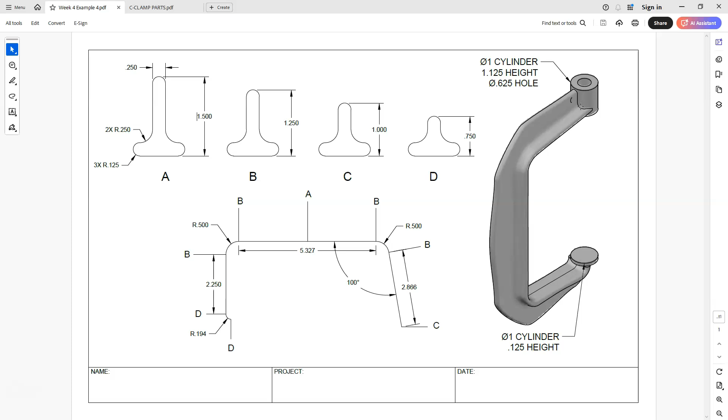So in this video, we're going to be creating these two parts, and we're going to save them. Remember, that's one of the key elements we have to do in order to make an assembly - each one of these files has to be its own separate file. Okay, let's go ahead and jump over to Inventor and get started.

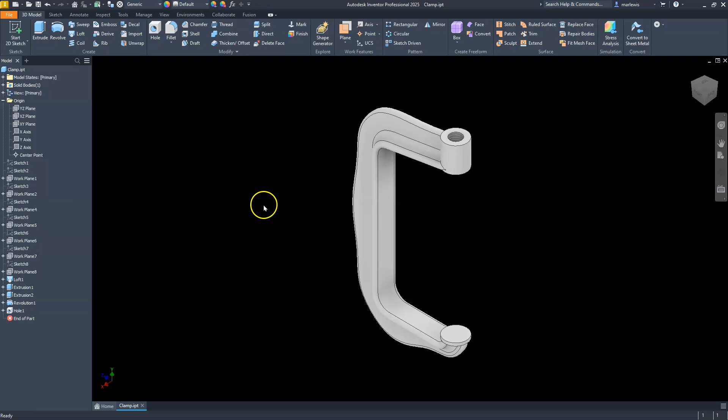Alright, continuing from our clamp here, we're just going to go ahead and start a new part. Remember, this is going to be in inches. Let's go ahead and hit the create button. Then I'll go ahead and start my sketch on the XY plane.

Then I'll create a line that goes straight across. We want to place the midpoint, so I'll use this coincident constraint, find the midpoint here, and place it right on my origin. Let's go ahead and put a dimension on this line, and this is going to be our overall dimension, which is 8.875. I'll come back and change that line to a center line in a second.

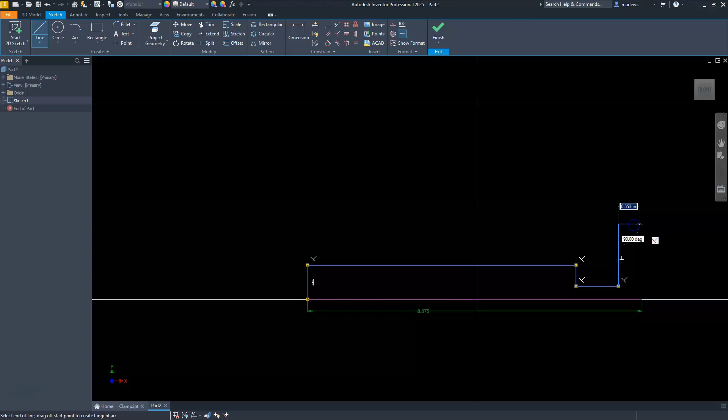Now I'm just going to freehand sketch the rest of this stuff out, over exaggerating these lines. We know that we have a line that goes something like this - it goes across, back up here, across here, and then ends here.

Okay, let's go ahead and select that line, make it a center line. Now we can go ahead and put some of these other dimensions on. So let's do a dimension from here to here. This has a diameter dimension, and it is set to 5/8. Go ahead and hit escape and move this up a little bit.

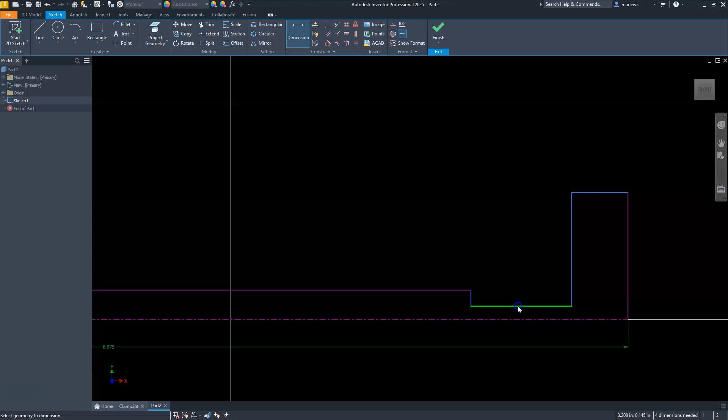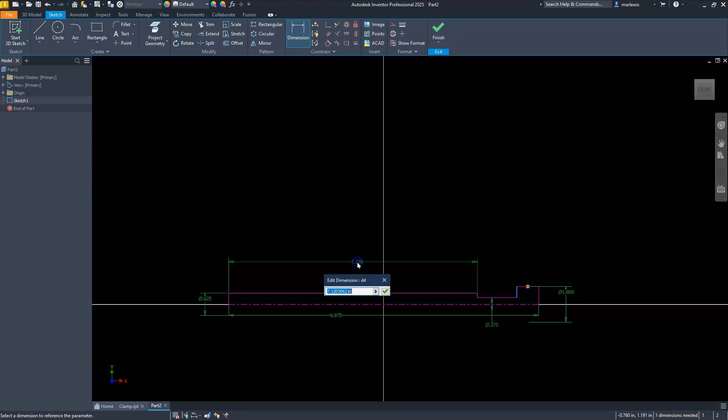Let's go ahead and put another dimension from here to here, 0.375. Dimension from here to here, and that is a dimension of 1 if I'm not mistaken. Let's go ahead and add a dimension going from here - this should be 8.5.

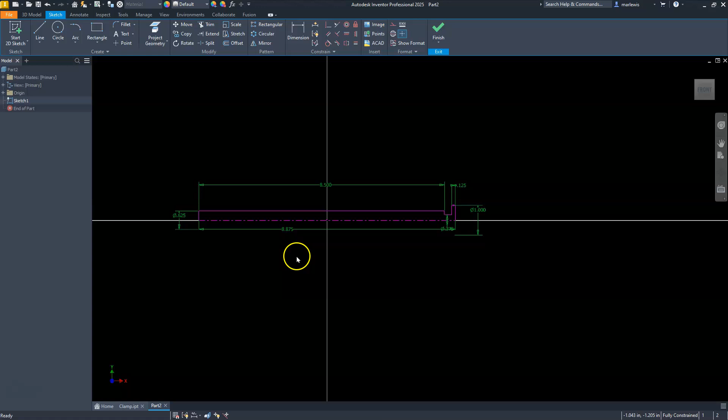Let's escape out of here and look into this corner here. Then we'll add a dimension on this part here, and it is 0.125. Okay, so we've got everything fully constrained. Let's go ahead and finish this sketch.

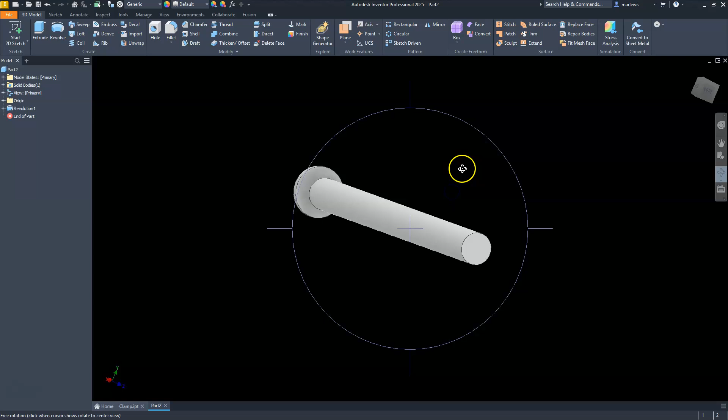Take a look at the Revolve command, and everything should automatically be satisfied here. We'll go ahead and hit the OK button. Let's rotate this around and look at the front view. I'll select the front view here and then create a sketch on it.

Alright, what I'll do next is go ahead and create a couple of rectangles, doing it on both sides. I'll use the collinear constraint, setting these two collinear to each other - these two here at the bottom. Then I'll go to the equal constraint and set these equal to each other.

Let's do some dimensions. From here to here, let's make it 0.5. From here to that point, let's make it half of this 0.5, so I'll select that 0.5 there and divide that number by 2. Let's see what else we can do here.

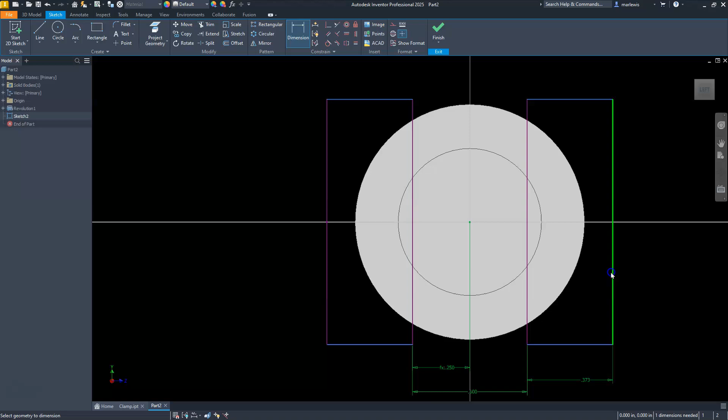We can do a horizontal constraint. Let's see if I can find this midpoint here. So I'll grab that midpoint to that center point, and then I think I just need a couple of dimensions - I should need a dimension here. I'll leave this dimension to whatever it comes out to. It's not really relevant here - I'm just doing this because I like everything to be fully constrained.

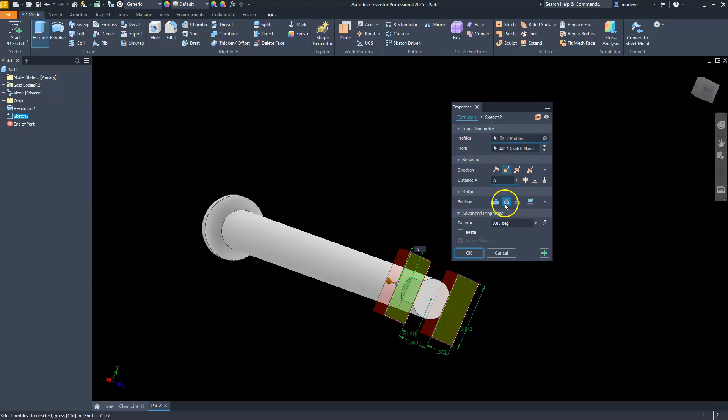Okay, so this is done. Let's go ahead and go to the extrude command. Now it's going to ask me which profile I want to extrude - so this one and this one. I'm going to send it the opposite direction, tell it 0.5, and it should automatically switch over to cut, which it did. Let's go ahead and hit the OK button.

All right, let's go ahead and select here. Let's put a sketch on that face. I'll use the point command and just click here.

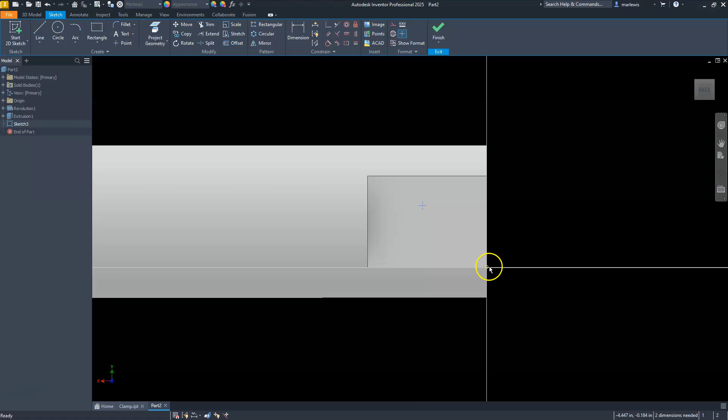All right, next I was looking for the origin, and I know it's somewhere around here. Sometimes it's kind of weird to see it. Let me slice through this and see if that'll make it better. Okay, there it is.

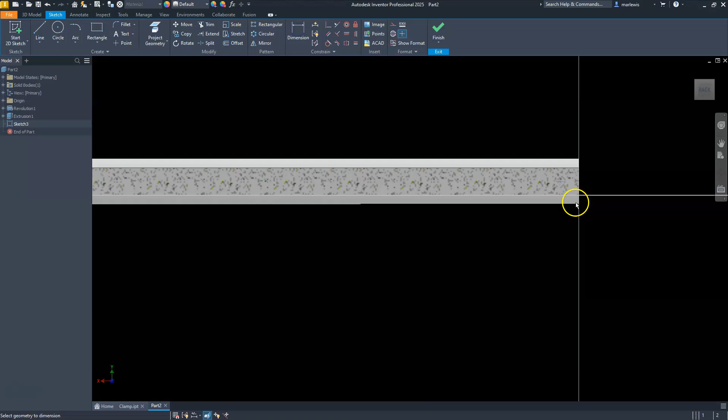All right, so I want to go ahead and make the origin here and that point horizontal to each other. And then that should just leave me with a dimension from here to here that's set to 0.25.

Let's go ahead and finish this sketch. You can see I have my hole there. So now when I go to the hole command, it should automatically select that.

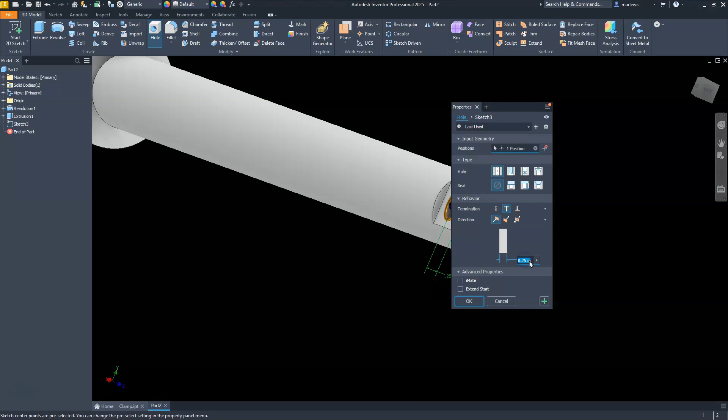We're just going to use a regular hole going through it. Let's see, we're going to tell it to go through all, and the diameter should be 0.1875. Let's go ahead and hit OK. And now that's sent it all the way through.

I think we have one more thing to do here, which is just go ahead and put a thread on this. So let's go to the thread command. I'll go ahead and select this face. I'll tell it a distance as well. So this is going across and it's going to use the 5/8 at 11, and it's going that direction.

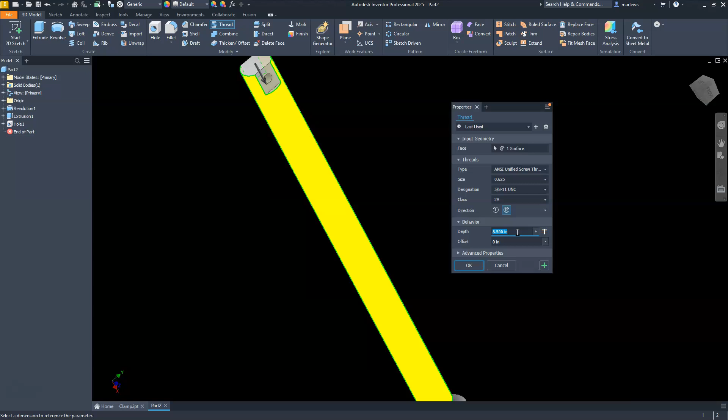Let's go ahead and tell it that we only want it to go up a distance of 6.5. And it looks like I had it going from the wrong direction. Let's see, let's go back here. And that's what you're seeing here at the top. So let's go ahead and give it an offset of 0.5.

There we go, and now everything looks good. This is one thing I do like about Inventor, is that it does give you kind of a bitmap, or it kind of shows you some of the threads that are going on.

All right, let's go ahead and save this. So I'm just using Control S, or you can select that button here. This is going to be my connecting rod.

And I do like to capitalize certain things here. Okay.

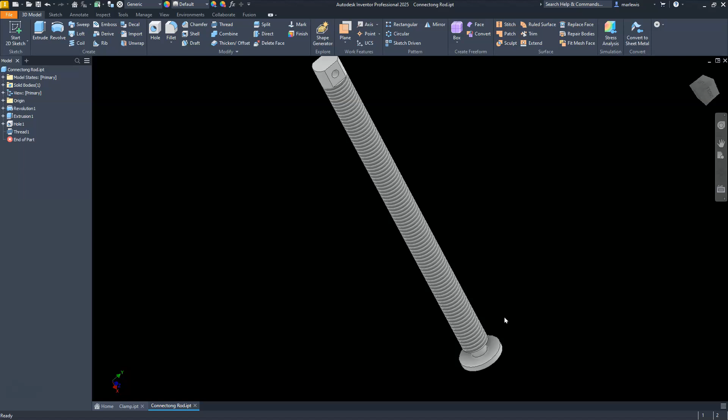All right, so my connecting rod is now done. Let's go ahead and create another part here. So I'll just go to New. It's going to be another standard part. Go ahead and hit the Create button.

Let's go ahead and create a sketch. We'll still use the same XY. Send a line going right across here.

Distance of this line should be set to, yeah, we can set it to 3. I'm just kind of thinking to myself, will that work? So in our case, by me setting this to 3, it should work fine.

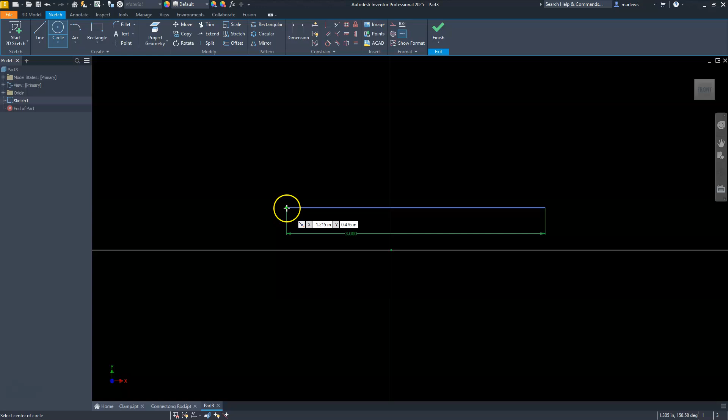Let's go ahead and put a couple of circles on the endpoints. We'll go ahead and set them equal. Let's go ahead and put a diameter dimension on this,

which is going to be 0.3125.

Go ahead and use the offset command. Let's go ahead and select this line here. Let's go up a distance of 0.0625.

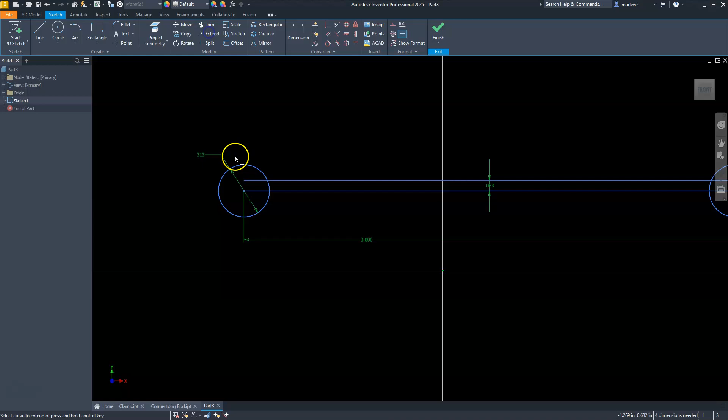We use the extend command just to extend these. It seems like it's locked onto those. Okay.

No biggie there. I'll just draw a line that goes across here. Do the exact same thing on the other side. And now we'll go to trim.

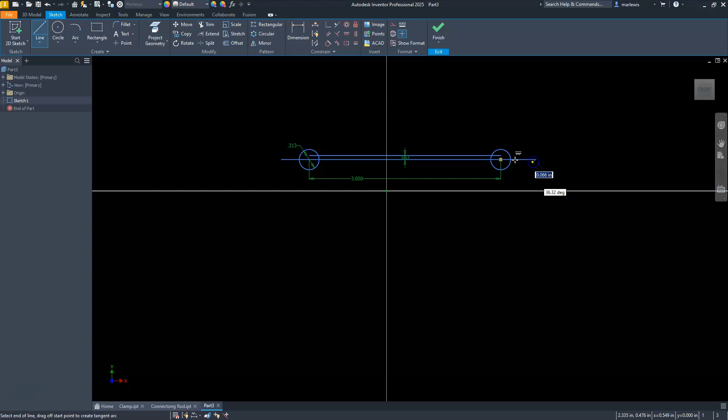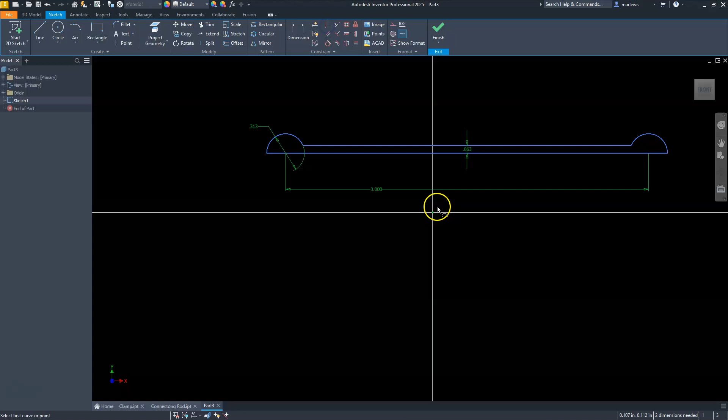Let's get rid of this bottom part in between here. Bottom part also in between there. Let's escape. Let's go find a coincident between the origin and, where are you? And that point. All right, so everything looks good.

Let's go ahead and select this line here and make it a center line. Oh, we already have that dimension on. I think everything is good to go.

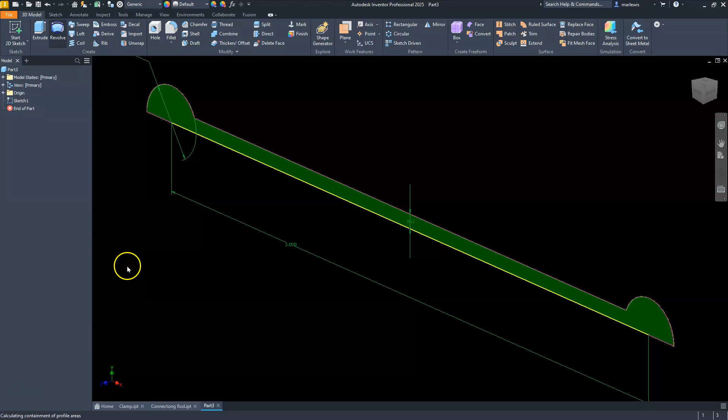Let's finish. Let's go to Revolve. It should be able to pick up all of this. Looks like it is done. And then we'll go ahead and save this one.

This is going to be our handle. Okay.

All right, now I want to thank you for tuning in. This is just a quick little video. We're just making these other two parts. Remember that these are going to be the other parts, and they're going to all go together and make this assembly that I'm going to make.

And this is a super simple assembly. It's just kind of an introduction and how to put things together. There are more in-depth videos on how to actually do more complicated assemblies, or constraints, as they're actually called here in Inventor.